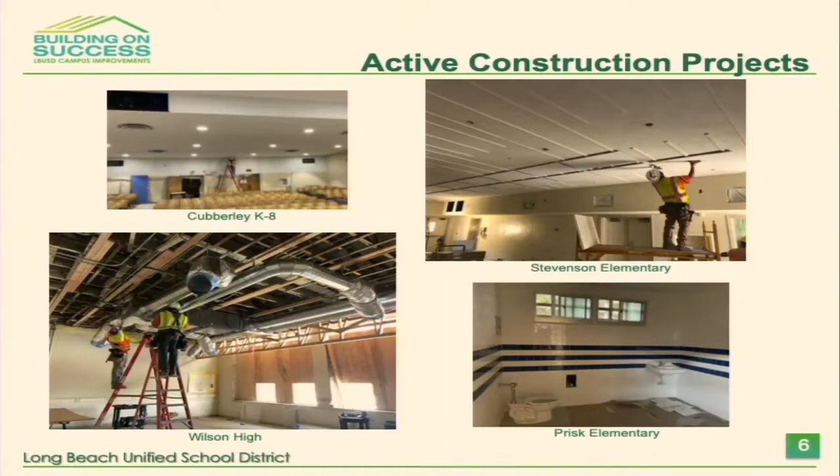We had one of the best bids we've seen in district history—22 bids received for a hard bid on that job. So we know it was competitive, and we know it's a hungry, good contractor. We're going to hold on to that and just schedule it out a little later.

New construction—I already referenced that we're going to get into phase 2B for Jordan, so I'll table that one for a little deeper into the presentation.

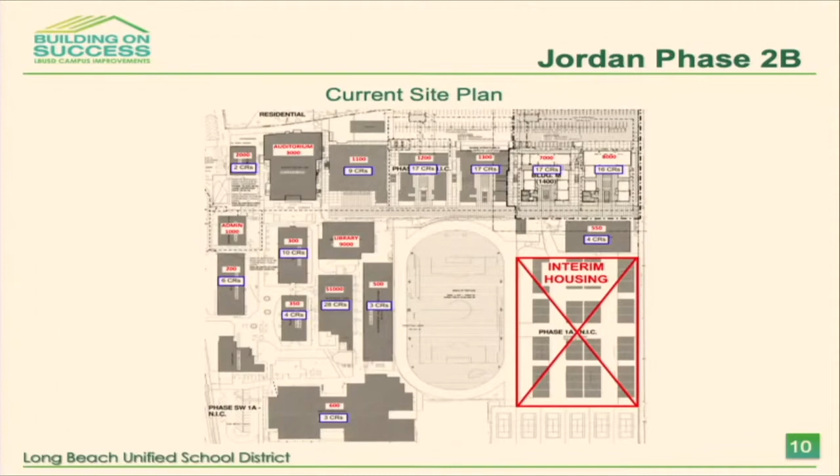We had building 200, 250, and 300, and the old cafeteria building, which sat at the corner off the parking lot. Part of this phase included demolition of those buildings and construction of 2 new 2-story classroom buildings, as depicted here. You also see a long courtyard or corridor that connects the campus and creates a nice gathering space for kids and a space to eat lunch.

There's also a small lunch shelter right off the admin building, tough to see here, but it's just to the right of the administration building. That was all part of Phase 2B as originally designed by the project architect.

What we saw with this project, as we advanced in design, construction trends started to go a certain way, and this was going to be quite costly. So we started being mindful of cost and looking into other potential options to have in our back pocket—always good to have a contingency plan.

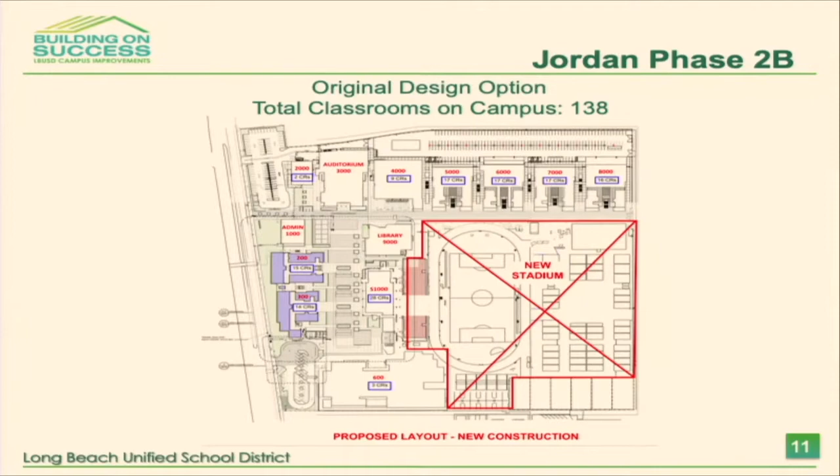So we looked at whether we could safely and adequately modernize those existing classroom buildings on campus. We explored multiple things with our project architect, looked at things every which way. From a cost-benefit perspective, it just wasn't going to pencil out to renovate those older buildings, so we started exploring another alternative.

We also started considering enrollment trends and capacity counts on this campus altogether. Here's a quick snapshot of enrollment today, which is just under 2,400. Going back 5 to 6 years, enrollment was close to 3,400 at one time, so we see that downward trend in enrollment. We looked at this alongside the cost side of the house.

We wanted to gauge what we're doing as part of this Phase 2B—are we doing the right thing by still building two-story large classroom buildings, or should we look at something slightly different?

What we developed with the help of our project architect and team is kind of a Plan 3 or Plan C, which is what we see here as our proposed plan. We're still very much proposing to develop this large courtyard area for students to gather and converse and have lunch. We're still proposing a large lunch shelter area.

This time we pictured it just below the admin building, within the space previously occupied by another proposed new building. We show building 400 pictured there with 14 classrooms, and we still propose to build that as one large standalone building. The building would house the AIMS program for the site, special ed, and some life skills programs.

We liked the proximity and location of that program because of its closeness to the parking lot to the south, which could create a good bus drop-off loop for special ed students if needed. So a lot of things are going in our favor with this design. Looking at the total number up top, 123 total classrooms on this site, when all is said and done that will give us capacity for roughly 3,500 kids on this campus.

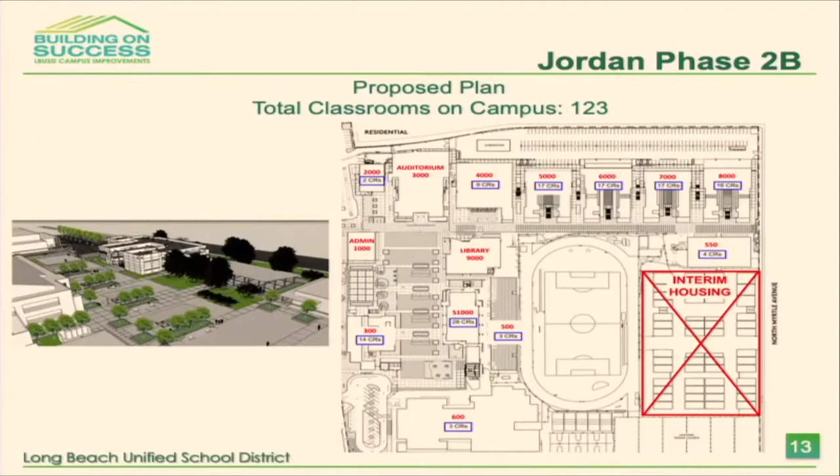From a cost standpoint, our original design option was inching close to $50 million to do the 2 new buildings plus the courtyard and lunch shelter. With this proposed plan, we're looking at $27 to $28 million in construction cost, which would likely take us to the 35 range or so for total project cost.

Here's our building floor plans. I won't spend too much time on this, but just wanted to give a quick snapshot at this point in time of what the interior of the building looks like. Floor 1 would house primarily special ed and life skills components for that program, and floor 2 would house the AIMS program. You see 7 classrooms apiece on each of those buildings. The building would also include office space, elevators, stairs, and support spaces for custodial functions.

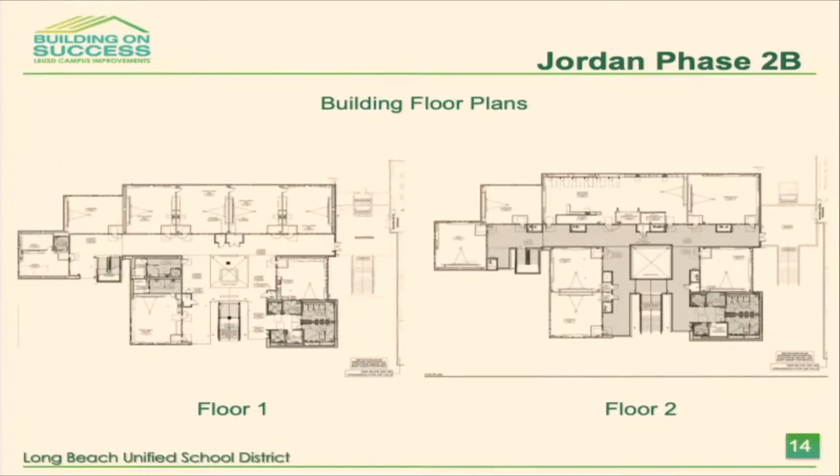I'll attempt to play this quick fly-through video. Might ask for a little help from Chris on this one if I don't get it. This is just a 20-second video clip, and it gives us a flyover of the Jordan campus to show what things look like and where they're situated in terms of new buildings, the courtyard I referenced, and other campus improvements we've already embarked on along the way.

Oh, it jumped right over. Thank you, Chris.

In the meantime, Mr. Miranda, are there accommodations for the wellness center at Jordan? I know that in the past we've had—and Ms. Kerr, maybe you could help me out with this—maybe it's not called the Wellness Center, but a place where students could go if they needed somebody to talk to. That type of thing. And it's located in a different building, so I don't know if they would move it necessarily, but it's in the ground floor of the science building. Okay, but it's still there? Correct, correct.

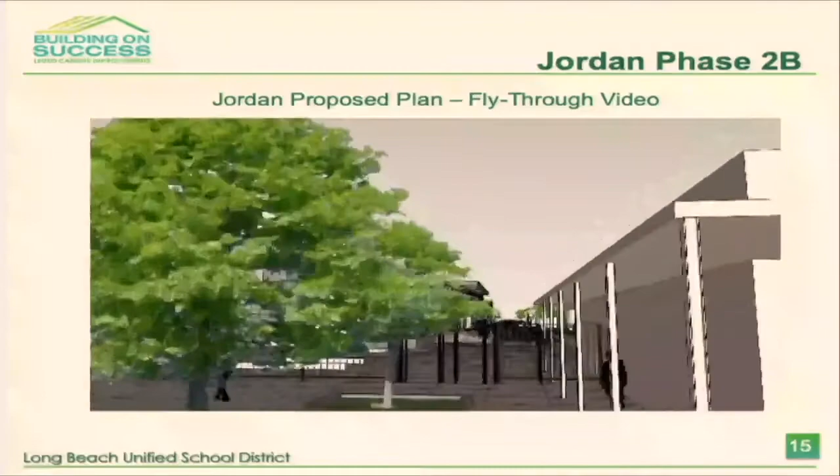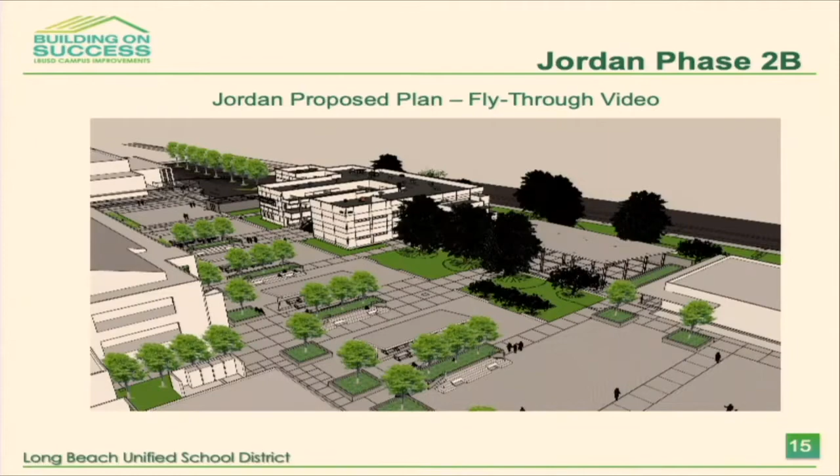So right now we're off of Atlantic. There you see the proposed lunch shelter right off of the admin building. The building at the center is the admin building, the true entry for students. We have the auditorium to the left, our current lunch shelter to the left as well. It gave us a quick flyover, but it really finishes on this proposed building footprint. There you see the proposed new building, the parking lot off to the upper left, the lunch shelter area, and the large courtyard area. The site could really benefit not just from the new building, but the gathering space. There are a number of things we address just with the demolition of some of those buildings from a security standpoint—lines of sight for administrative staff and principals as they're supervising students on campus. It really just checks a number of boxes, we feel.

Thank you. So Ms. Craighead, for your reference, on the bottom left where those 4 trees are, the Wellness Center is tucked in a classroom right there. Oh, okay, there you go.

Okay, my mind is swirling because I haven't seen this yet. It looks beautiful. So this involves the demolition of, if I'm not mistaken, 2 buildings to create the courtyard, and then the 2 classroom buildings along Atlantic, or the building that includes the former cafeteria, correct? Correct, so it's 4 buildings in total. And so that new building that would house special ed and AIMS would come as you have the drive-through area in front of the gymnasium. The project would include a slight reconfiguration, a slight expansion of that parking lot drop-off loop that you see down there as well, so that the building would accommodate buses for special education—a direct drop-off—and those classrooms would be the newest and most modern special ed classrooms with all of the facilities needed.

Absolutely, because they've got a great program and I know they've worked hard on it. So I probably have more questions that may come up at the end of your presentation as I've thought about it. I look forward to getting a copy of this presentation, and that 20-second video would be really helpful.

There are just a few slides here, and then we'll really want to gauge your thoughts and feedback with respect to these design options. We're at a point in our design where we require some decisions prior to moving forward into the next phase. On a typical project of this size, we roughly look at a year for overall design and engineering, another year for state agency approvals and a bidding process before we can break ground. For both the Keller project and the Wilson project, as you remember, we showed those roughly two years out in terms of the construction schedule.

So we're really at that point. What I want to walk you through is just a few design options.

Here you see a traditional design option, really what's carved out as a boys and girls dedicated locker room facility. You see the boys space up top, the girls space down below in the yellow or orange highlighted spaces. What you see as part of this facility is 2 adjoining classrooms for physical education, fitness, and other components. But really what you see is that clear line across the middle separating the boys space from the girls space.

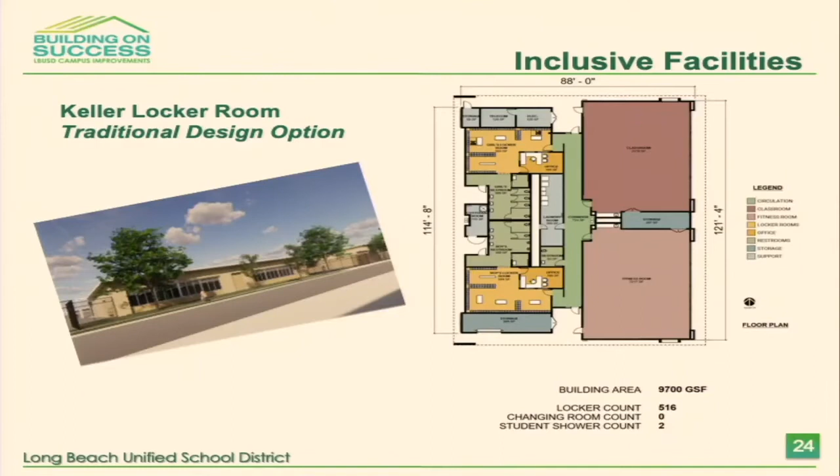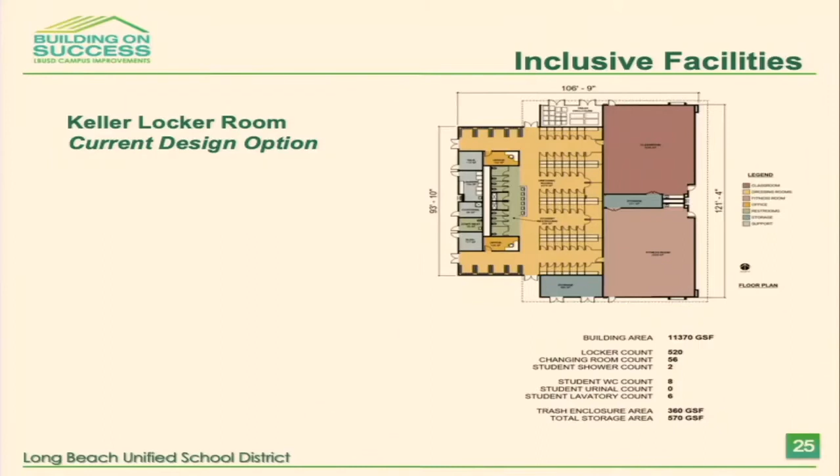So again, these are just some very early rough sketches and schematic designs, but really the goal of our presentation—while I want your feedback and thoughts on the entirety of the presentation, I really welcome it with respect to this specific part on the inclusive facilities.

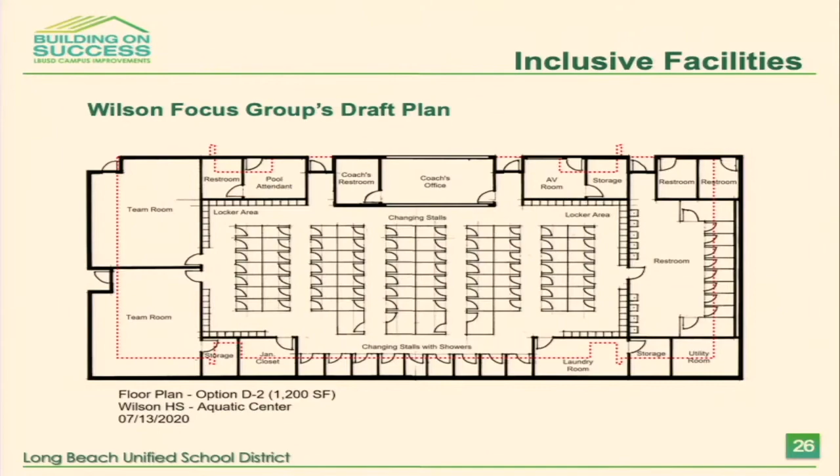I have a question about the capacity of those locker rooms with the individual spaces. About how many students will that configuration accommodate?

Okay. Can I comment, question?

I'm really glad to see us moving in this direction. My specific question is my hope that as we do this inclusive restroom locker room, inclusive facilities in general, that as we move forward in Jordan in the planning phases, that it becomes the standard moving forward at Jordan specifically.

And I appreciated the conversation in that we've come to the place where we understand that this is about safety for all students. But I don't want to lose sight of the fact that we started this conversation because our LGBTQ plus community asked us to. Specifically, our trans students asked us to. And it wasn't just about privacy, it was about safety, and a real fear in them around some of the issues that we talked about.